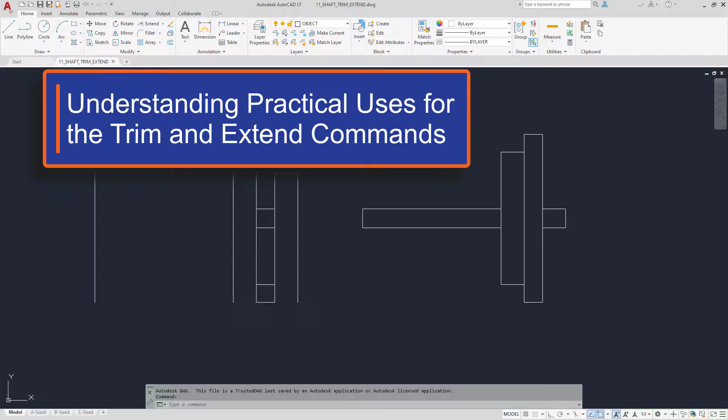The trim and extend commands are a powerful pair of commands, and you will find many practical, real-world applications for these commands. For example, you can use trim and extend to modify the lines on the left to create the shaft shown on the right.

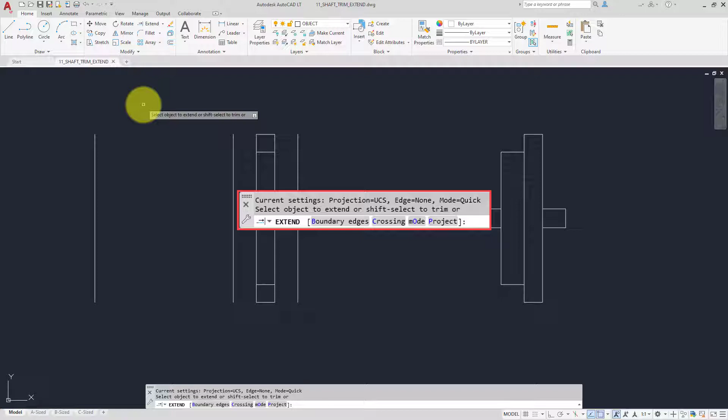Start with the extend command. On the home ribbon, in the Modify panel, click the Extend tool. On the command line, the program displays the current settings. Note that by default the mode is set to Quick, which means that the program pre-selects all potential boundary objects, so you do not need to first select boundary edges. You can simply begin selecting the objects you want to extend.

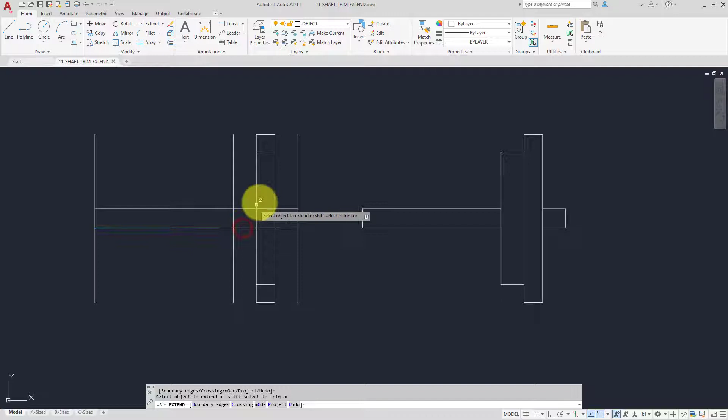Each time you move the cursor over an object, you can see a preview of how the object will be extended. The direction in which the object will be extended depends on where you select it. Each line will be extended in the direction closest to the end at which you pick the object. If you click the object again, it will extend to the next boundary edge. Extend each of the horizontal lines until they match the finished shaft drawing on the right.

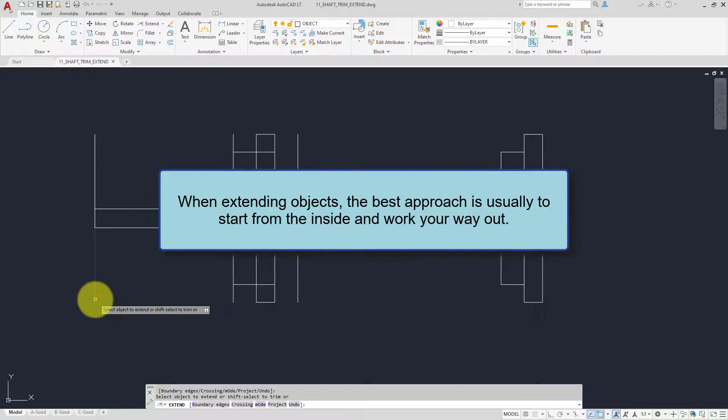Once you have extended all the lines that need to be extended, you are ready to start trimming. Even though you started with the Extend command, you can press and hold down the Shift key to immediately start trimming lines. And here is a tip. When extending objects, the best approach is usually to start from the inside and work your way out. When trimming lines, it usually works best to reverse the process, start from the outside and work your way back toward the innermost portions of the object.

The command preview makes it very easy to see the results of your actions before you click. When trimming, as you move the cursor over the segment to be removed, the preview and cursor badge clearly indicate the portion of the object that will be deleted. Continue pressing the Shift key as you trim objects.

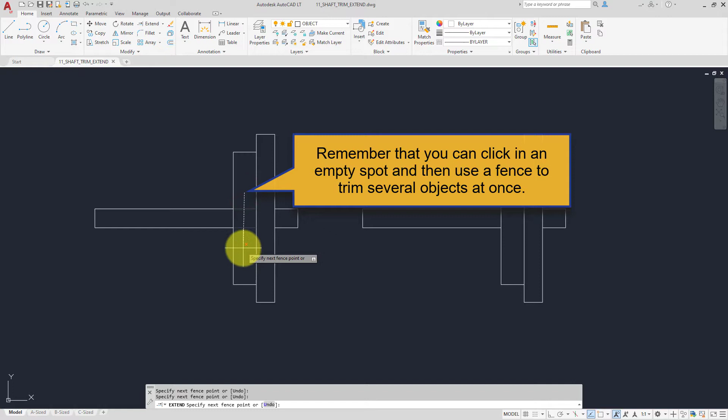Also, remember that you can click in an empty spot and then use a fence to trim several objects at once. When you have finished trimming objects, you can release the Shift key and then press Enter or Escape to end the command.